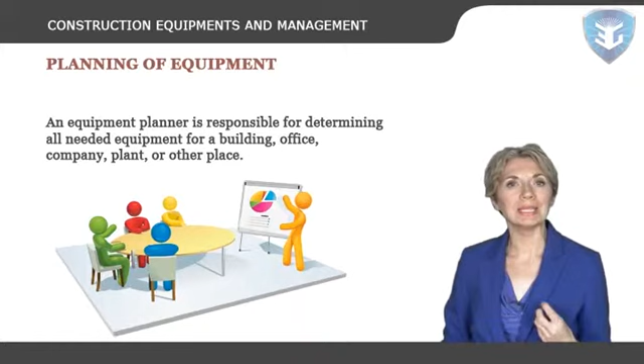Let's now discuss the planning of equipment. An equipment planner is responsible for determining all of the needed equipment for a building, office, company, plant, or other place. The equipment planner works with construction crews, department heads, architects, and designers to get what will be needed for a completed project. The equipment planner must not only plan what equipment will be needed within a building, but also locate and purchase the equipment.

Let's now discuss the factors affecting the selection of construction equipment. Standard type of equipment: there's no such definition of standard type of equipment. An equipment may be standard to one contractor, but may not be to another; it depends on the operations of a contractor or company. Special equipment: one definition of special equipment is one that is manufactured for use on a single project or a special type of operation.

Replacement of parts: one factor in the selection of branded equipment is the availability of replacement parts. When buying equipment, spare parts must readily be available or could easily be purchased. Cost of owning and operating construction equipment: there's no exact method of determining the probable cost of owning equipment. Carefully kept records should give information as a guide as to the type of equipment one needs to purchase.

Economic life of construction equipment: the owner of the construction equipment should be interested in obtaining the lowest possible cost per unit of production. In order to accomplish this objective, he must follow an informed program of equipment replacement. How many years will he use his equipment? Sources of construction equipment...

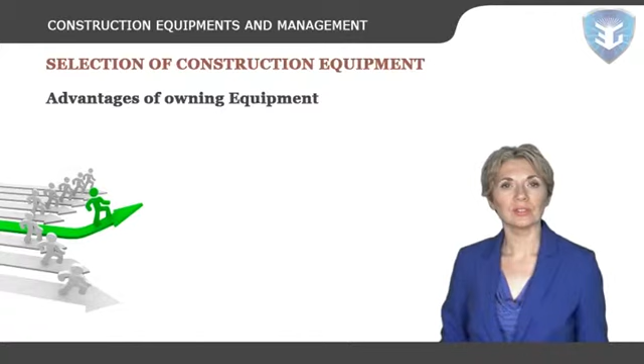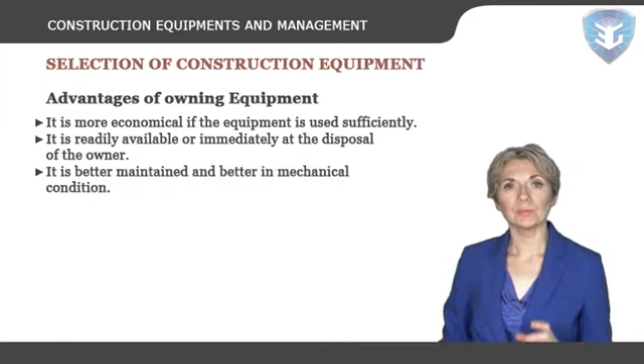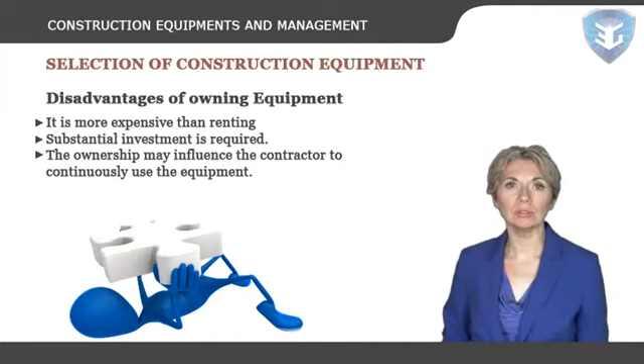Advantages of owning equipment: it's more economical if the equipment is used sufficiently, it's readily available or immediately at the disposal of the owner, and it's better maintained and in better mechanical condition. Disadvantages of owning equipment: it's more expensive than renting, substantial investment is required, and ownership may influence the contractor to continuously use the equipment in lieu of more modern equipment.

Now let's talk about equipment management in projects. A successful project manager must effectively manage the resources assigned to the project.

This includes the labor hours of the designers, builders, testers, and inspectors on the project team. It also includes managing any labor subcontracts.

The equipment that has to be managed as part of the project depends on the nature of the project. A project to construct a frozen food warehouse would need earth-moving equipment, cranes, and cement trucks. The project management key for equipment is much like for people resources.

The management of ongoing tasks requires a different approach to the management of one-off tasks. Project management is about getting these temporary endeavours complete on time and on budget. The sad truth is that for one reason or another, most projects fail to meet their objectives.

So here's some weapons you can add to your arsenal to make sure your project has the best chance of success. Firstly, make sure all stakeholders agree in granular detail on the final outcome of the project. By agreeing about deliverables at the outset of a project, you'll guard against the scope growing monstrously out of control.

Planning is 80% of project management. Remember the 6 Ps: proper planning prevents poor project performance. There's a lot of great tools that can help you keep track of your project. Use these during your planning.

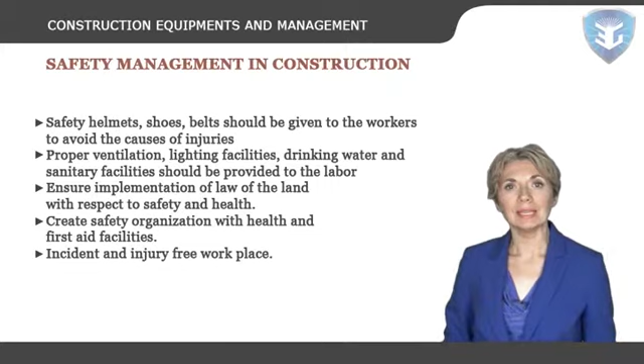Create a safety organization with health and first aid facilities, an incident and injury-free workplace, and adequate provision of fire prevention systems. No child labor, no smoking.

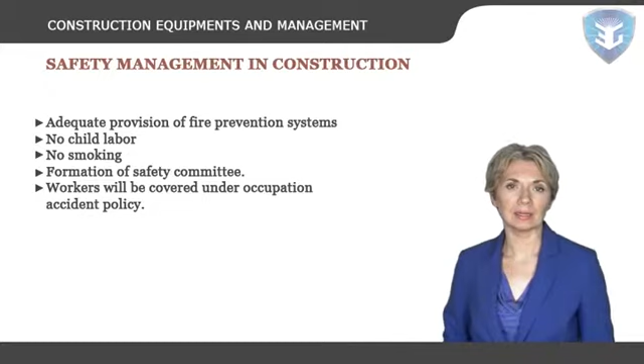Formation of a safety committee. Workers will be covered under an occupation accident policy. Monitoring of implementation.

Responsibilities of a safety officer: before commencing any work on a site, a safety officer is appointed who will ensure that the safety measures at the site are taken.

The safety officer will perform safety rounds all over the site every day and advise the concerned supervisor regarding any unsafe act or condition, and the remedial action required will be implemented.

Safety trainings will be conducted to all workers and staff before they start their work, as well as at regular intervals. Records of these trainings will be maintained by the safety officer.

Let's now explore the choice of equipment and standard production rates.

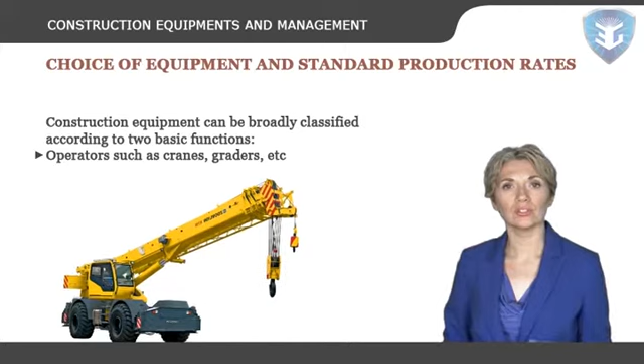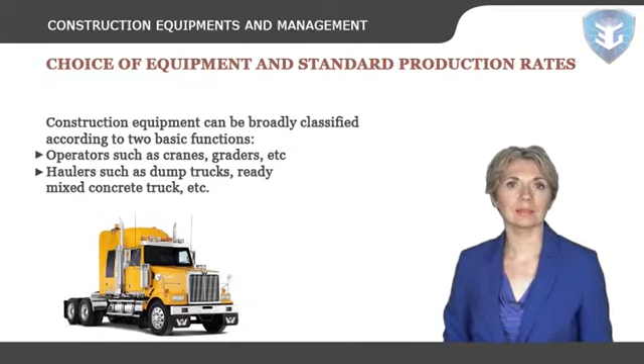Typically, construction equipment is used to perform essentially repetitive operations and can be broadly classified according to two basic functions: operators such as cranes, graders, etc., which stay within the confines of the construction site, and haulers such as dump trucks, ready-mixed concrete trucks, etc., which transport materials to and from the site. In both cases, the cycle of a piece of equipment is a sequence of tasks which is repeated to produce a unit of output.

In excavation for building construction, for example, factors that could affect the selection of excavators include size of the job—larger volumes of excavation will require larger excavators or smaller excavators in a greater number; activity time constraints—shortage of time for excavation may force contractors to increase the size or numbers of equipment; and availability of equipment—productivity of excavation activities will diminish if the equipment used is available but not the most adequate.

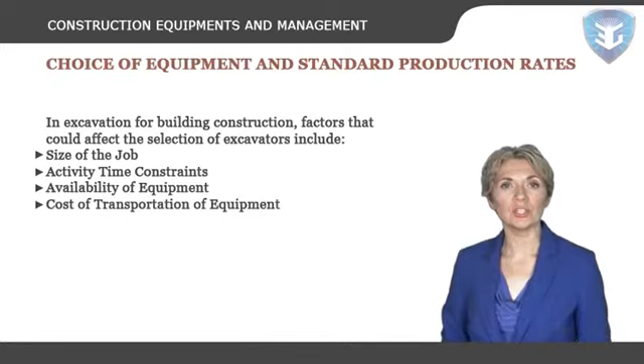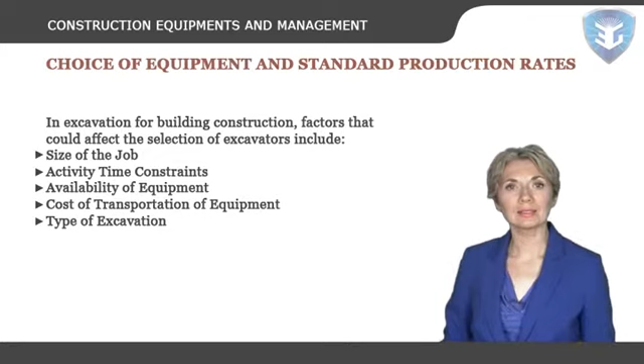Cost of transportation of equipment depends on the size of the job, the distance of transportation, and the means of transportation. Type of excavation: principal types of excavation in building projects are cut and/or fill, excavation massive, and excavation for the elements of foundation.

Construction tools and equipment are constantly being developed to make every stage of house building easier, quicker, cheaper, and safer. If one has decided to manage construction work, there will be some stages where one will need to arrange equipment or construction tools for work to progress.

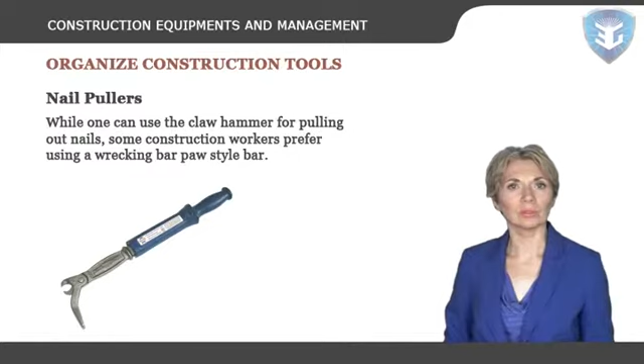Hammers: a claw hammer is used in construction for driving in nails and pulling them out. Construction elements such as framing, light finishing, and demolition all call for the use of a quality hammer. Nail pullers: while one can use the claw hammer for pulling out nails, some construction workers prefer using a wrecking bar or paw style bar. These nail pullers are far more useful for pulling out nails driven deeply into wood.

Screwdrivers: a collection of various sizes of both flathead and Phillips screwdrivers is a necessity throughout a construction project. A selection of screwdrivers is much easier to carry around than a power drill, and these tools can be used for driving fasteners into wood, metal, or stone. Invest in a nut driver for turning hex head screws and bolts.

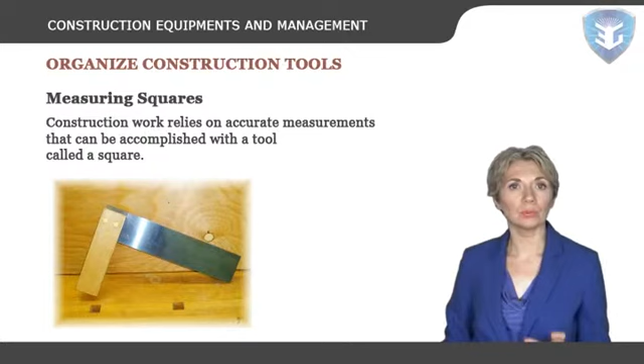Measuring squares: construction work relies on accurate measurements that can be accomplished with a tool called a square. It takes precise measurements of right angles, while a combination square with a bevel gauge makes it easy to duplicate any kind of angle for transferring to a board that needs to be cut.

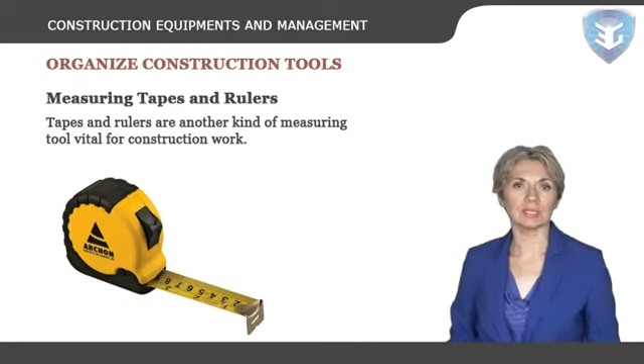Measuring tapes and rulers are another kind of measuring tool vital for construction work. If the construction work is building a home, one can probably get by with just a 12-foot retractable steel tape measure, but go with a 30-foot tape for working on larger projects.

Saws are used for cutting lumber to be used in the framing process. Hand saws include the cross-cut saw for making cuts across the wood grain and a drywall saw for cutting through plaster, gypsum, or wallboard. Let's now discuss excavating and lifting equipment.

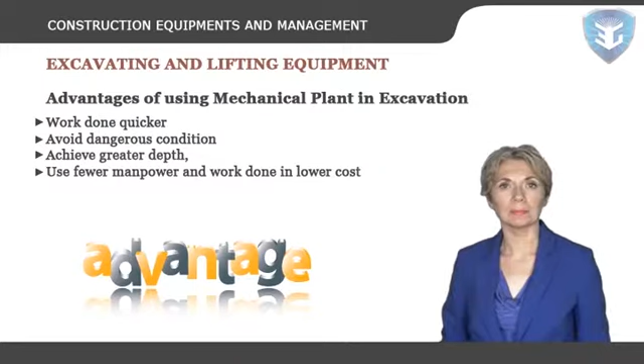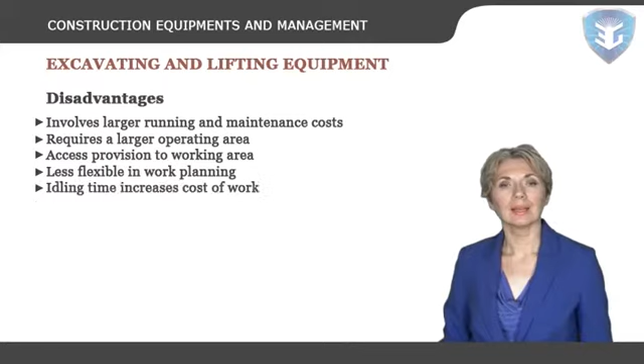Excavation and earth-moving plants: advantages of using a mechanical plant in excavation are that work is done quicker, avoiding dangerous conditions of work by human workers—for example, the existence of groundwater or collapsing of soil—achieving greater depth, using less manpower, and getting the work done at lower cost for larger scale work only. Disadvantages: it involves larger running and maintenance costs, requires a larger operating area and access provision to the working area, is less flexible in work planning, and idling time increases cost of work.

Brief description of plants. Face shovel excavators: these can be cable or hydraulic operated, mounted on wheel or track, and are fitted with buckets which face away from the machine. Back actors or backhoes are used for below ground level excavation; the bucket acts downwards and drags towards the machine and tilts upwards to hold the loads.

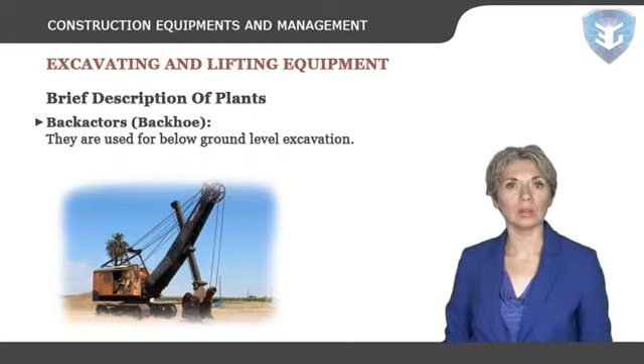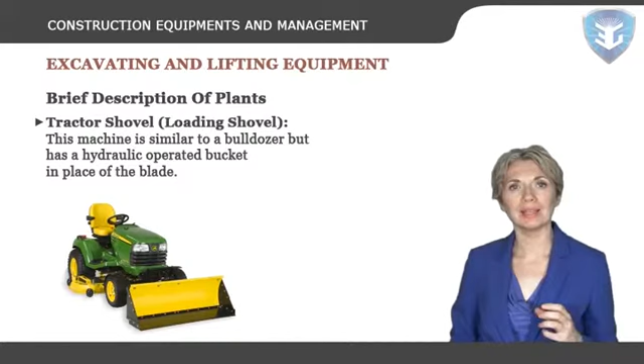Bulldozers are traditionally track-mounted tractors with significant weight so that they can work easier with soil. Tractor shovel or loading shovel: this machine is similar to a bulldozer but has a hydraulic-operated bucket in place of the blade. Materials above the base of the vehicle can be lifted and unloaded onto a dump truck or onto a spoil heap.

Clamshell excavator: this is somewhat like a crane, usually track-mounted, and hangs a wire-operated clamshell at the jib. It's used to handle or load soft or saturated soil on site, and is more useful on a very big site where a large amount of soil material needs to be removed. Powered shovel or drill: this is for cutting larger boulders or rock; usually the drill is pneumatically operated and mounted on a tracked base.

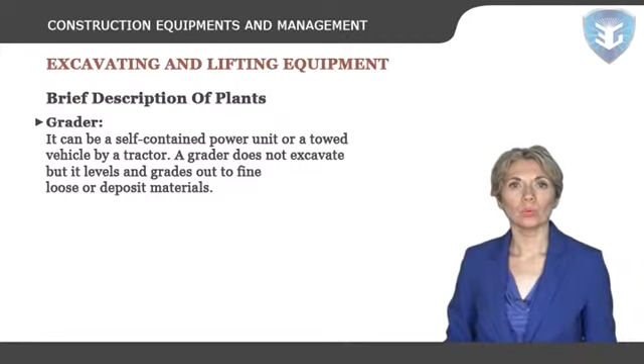Grader. It can be a self-contained power unit or a towed vehicle pulled by a tractor. A grader does not excavate, but it levels and grades out to fine loose or deposit materials. A centrally mounted blade, much narrower and flatter than a bulldozer's, serves this purpose.

Scraper. This machine works similarly to a grader, but it has a container to hold the surplus soil after scraping. The container, once filled with soil, can also be used for backfilling hollow ground.

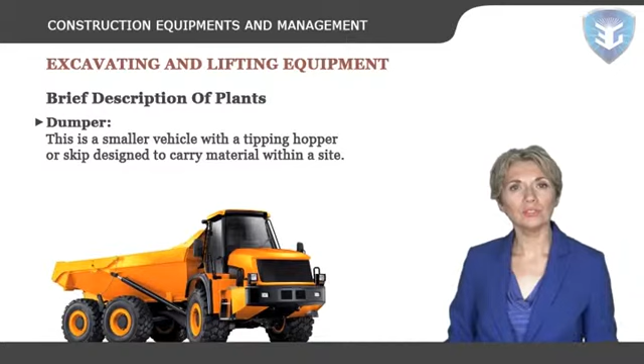Dumper. This is a smaller vehicle with a tipping hopper or skip designed to carry material within a site. The hopper is usually front-mounted to provide better control for the driver.

Many different types of heavy construction equipment exist, so the list of all the different types would be quite extensive. These pieces of heavy construction equipment are generally designed to move large amounts of earth or other materials.

Skid steer. Skid steers are a general term describing a variety of equipment characterized by a specific type of steering called skid steering. A skid steer is maneuvered through a system of braking and engaging the tracks or wheels on one side of the vehicle.

Crane. The crane is another popular piece of construction equipment mainly used for deconstruction. Cranes are operated by a series of cables that lower and lift materials, and are mainly used on projects dealing with tall structures.

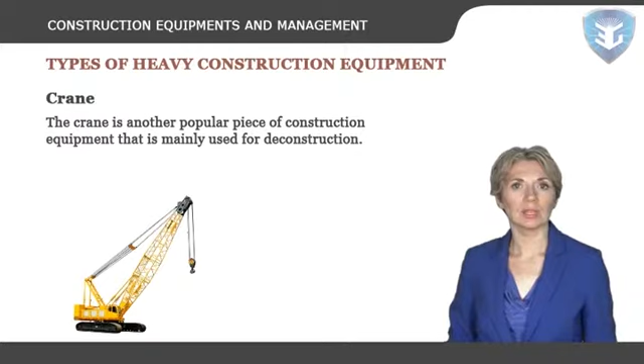Backhoe loader. A backhoe loader is a type of construction equipment that has a front bucket or shovel and a small backhoe in the rear, with the entire piece of equipment combined with a tractor. A backhoe loader has a comparatively small frame, which allows the driver more control over its movement.

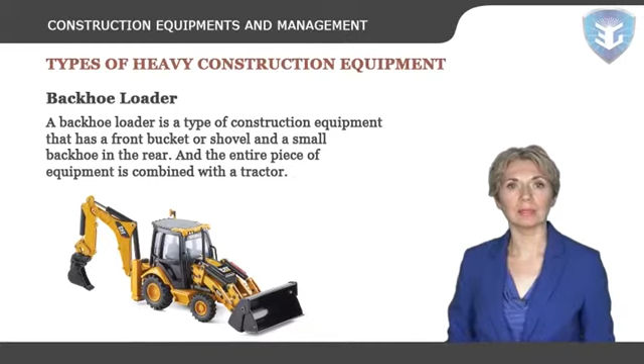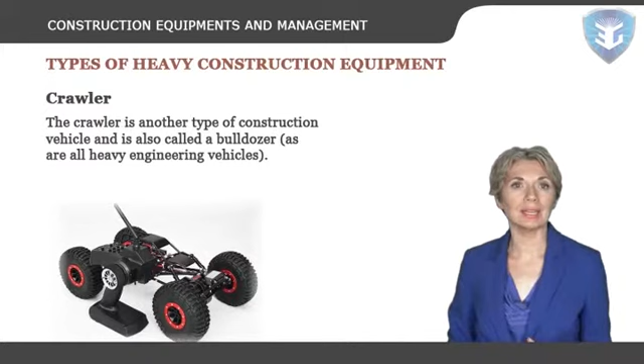Crawler. The crawler is another type of construction vehicle, also called a bulldozer, as are all heavy engineering vehicles. A crawler is essentially a tractor that has a dozer blade attached to it. Crawlers are powerful vehicles commonly used for a variety of bigger construction projects.

Loader. A loader is another type of vehicle, also known as a bucket loader, front-end loader, scoop loader, or front loader.

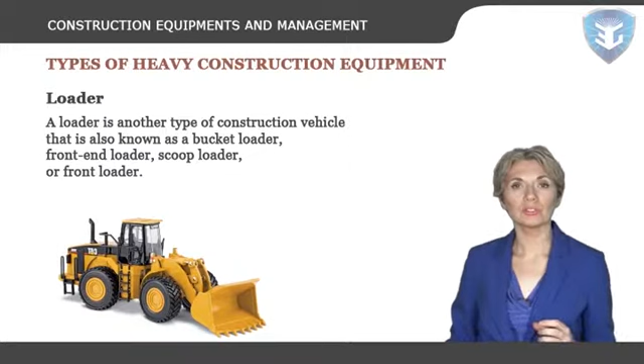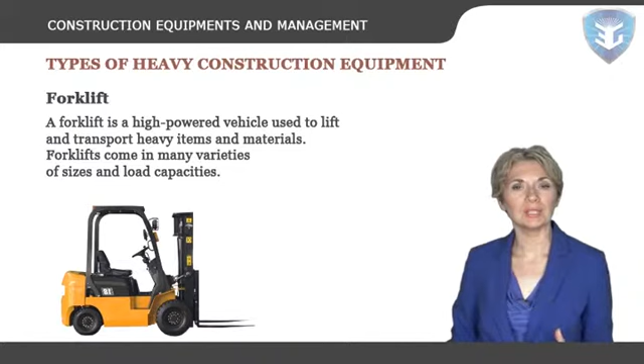Forklift. A forklift is a high-powered vehicle used to lift and transport heavy items and materials. Forklifts come in many varieties of sizes and load capacities. The majority of forklifts are not used in construction projects, but rather in manufacturing facilities or warehouses that require frequent lifting and transporting of heavy materials.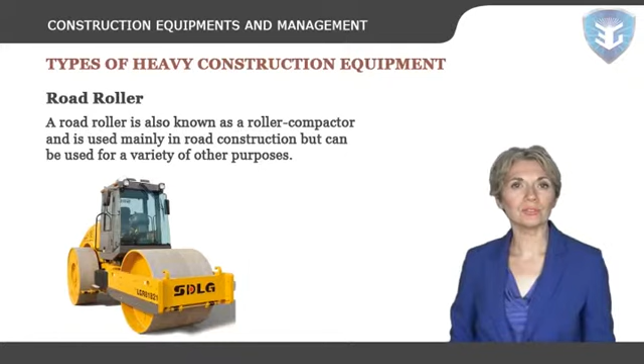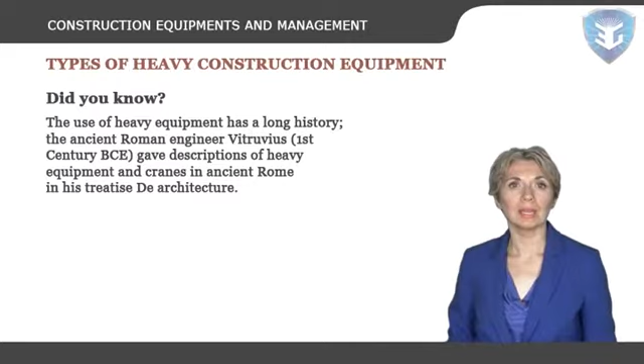Did you know the use of heavy equipment has a long history? The ancient Roman engineer Vitruvius, writing in the 1st century BCE, gave descriptions of heavy equipment and cranes in ancient Rome in his Treatise on Architecture. Now, in the end, let us summarize what we have learned in this lecture.

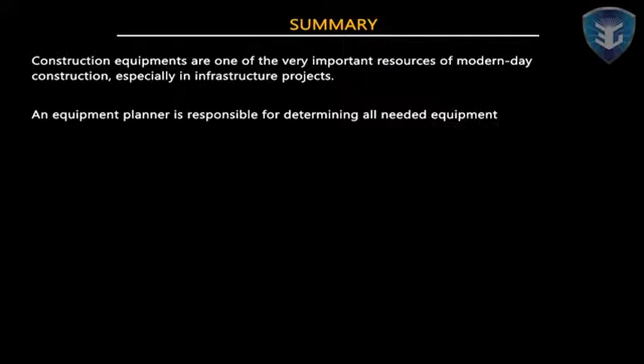Construction equipment is one of the very important resources of modern-day construction, especially in infrastructure projects. An equipment planner is responsible for determining all needed equipment for a building, office, company, plant, or other place.

Earth-moving and mining equipment has been designed primarily to move earth and minerals in large earth-moving and mining projects. Construction tools and equipment are constantly being developed in order to make every stage of house building easier, quicker, cheaper, and safer. Underground mining equipment is aimed at moving material in very low headroom and confined space environments.